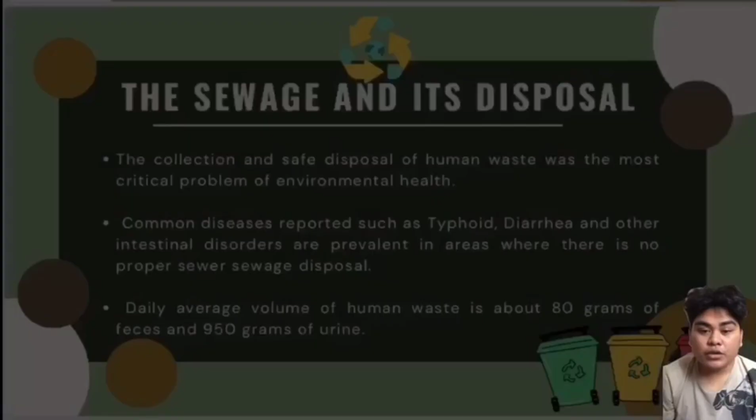Our topic is all about sewage disposal system. Ngayon, pag-usapan natin kung gaano ka-importante yung tamang pagde-dispose ng human waste. Ang collection and safe na pagtatapon ng mga tao ng basura ay isa sa pinakamahalagang suliranin ng ating environmental health na kailangan pagtuunan ng pansin. Maliban sa malaking epekto nito sa ating environment, meron din itong malaking epekto sa health ng mga tao.

Ayon sa isang statistical report, kalimitan sa mga waterborne disease katulad ng typhoid at diarrhea ay cause ng walang proper sewage disposal system. Kapag ang dumi o ihi ng tao ay nilagay mo sa isang hukay, yung mga bakterya ay hindi naman kayang umakyat palabas doon. So meaning, nadadala yung mga bakterya sa pamamagitan ng daloy ng tubig o yung mga hayop gaya ng ibon, daga, ipis at iba pang pwedeng magdala nito.

Ang daily average volume ng human waste kada tao ay umaabot ng 80 grams of feces at 950 grams of urine.

Kapag may halo naman sa tubig ito, ay may rate na 30 to 100 galon kada araw na nagiging kanal. Sa total ng sewage, 50% doon ang organic at nabubulok. Habang nade-decompose ito ay mas bumabaho at nagiging dark ang kulay.

On the other hand, maging bago o matagal na ito ay nagko-contain pa rin ng harmful organism that causes diseases. Dahil ayon sa WHO o World Health Organization, may mga tao pa rin walang proper na comfort room at sa open places sila dumudumi at umiihi, like sa dagat o sa ilog.

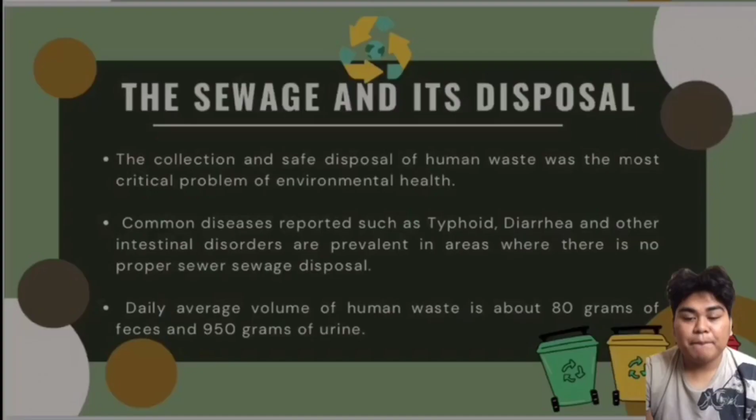Kaya ngayon, alam na natin kung gaano ka-importante ang sewage disposal system. Now let's talk about the types of sewage disposal system. Sewage disposal system has 4 types: the cesspool, the privy, the septic tank, and the public sewer line.

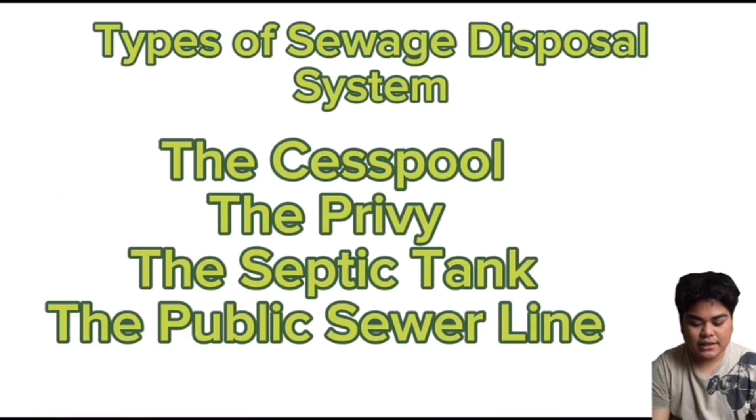Cesspool. The cesspool is a hole in the ground, curved with stones, bricks, concrete hollow blocks, or other materials laid in such manner as to allow raw contaminated sewage to leach into the soil. The organic waste accumulates and is finally disposed of by disintegration process.

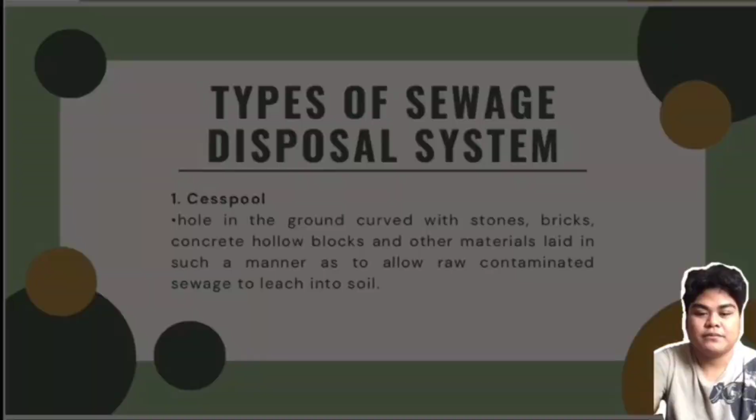So ano ang cesspool? Ang cesspool ay isang hole na binubuo ng bricks, concrete hollow blocks at mga bato. Ang standard size ng cesspool ay 750 to 1,500 gallons at may ilalim na 9 feet. Ang cesspool ay isang closed container at ang ilalim ay lupa na.

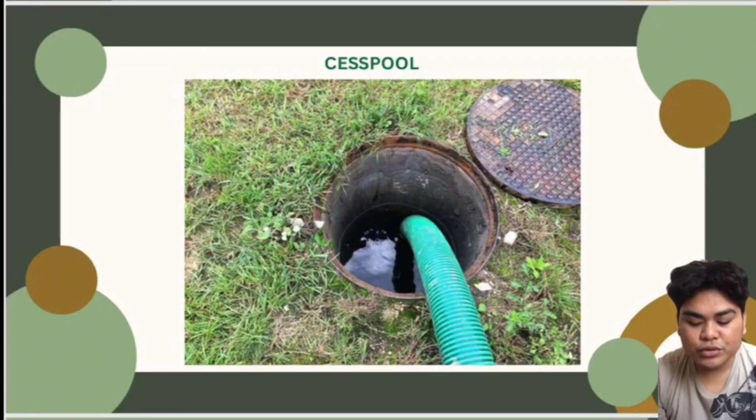Ang disadvantage nito ay mabilis mapuno at kailangan patanggalan ng laman ng 1 o 2 beses kada linggo, kaya naman malaki ang gasto. According to my research, cesspool that is well maintained can last up to 90 years. However, if you fail to regularly clean and empty your cesspool, even the most robust system won't outlast their design life.

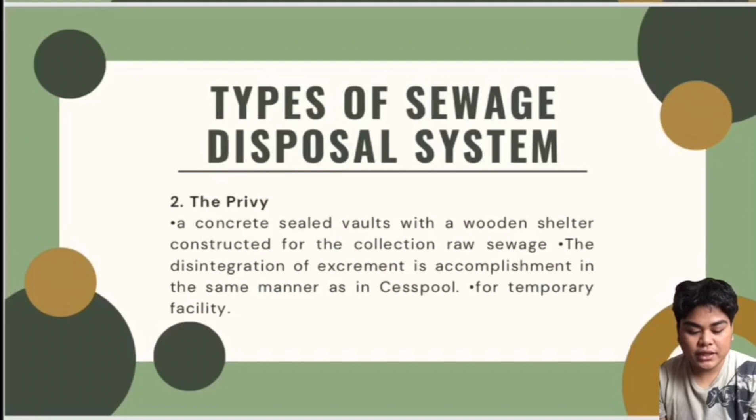Number 2, the privy. The privy is a concrete sealed vault with a wooden shelter constructed for the collection of raw sewage. The disintegration of excrement is accomplished in the same manner as in a cesspool. It is objectionable because of the danger of contaminating the source of water supply.

Ang privy, kung meron kayong nakikita sa mga movie na CR na walang bowl at sa sahigan may butas, at kahoy ang mga dingding, yun ang privy. Hindi ito kinakailangan na may tubig dahil hindi kailangan ng tubig para i-flush ang feces.

Merong ilang model ng privy na gumagamit ng ash, sand, sawdust para mapabilis ang pag-decompose ng mga feces at mawala ang amoy. Pero di pa rin maiiwasan ang paggamit ng tubig, at maaari nitong makontaminate ang groundwater dahil hindi naman sobrang secure yung human waste mula sa lupa sa paligid nito.

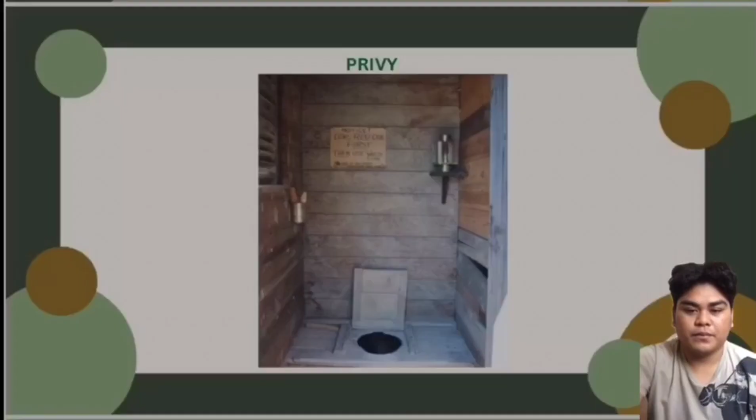Third, the septic tank. The septic tank is a device or receptacle used to expedite the decomposition of the elements contained in a raw sewage waste. Raw sewage consists of water and settleable solids called organic materials that can be precipitated in a septic tank in a very short time.

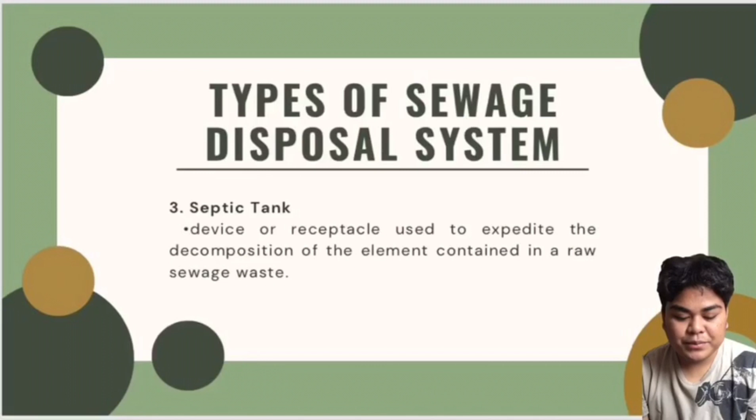So ang septic tank ay isang device or receptacle na ginagamit para mapabilis ang pagde-decompose ng mga elements sa loob ng raw sewage. So ano nga ba ang raw sewage? Ang raw sewage ay ang tubig at settleable solids, na ang mga organic material that can be precipitated sa septic tank sa maikling panahon.

Ang main function ng ating septic tank ay para ma-liquefy and precipitate ang solid waste. Septic tank is to hold the wastewater long enough to allow solids to settle down to the bottom forming sludge, while the oil and grease floats to the top as scum.

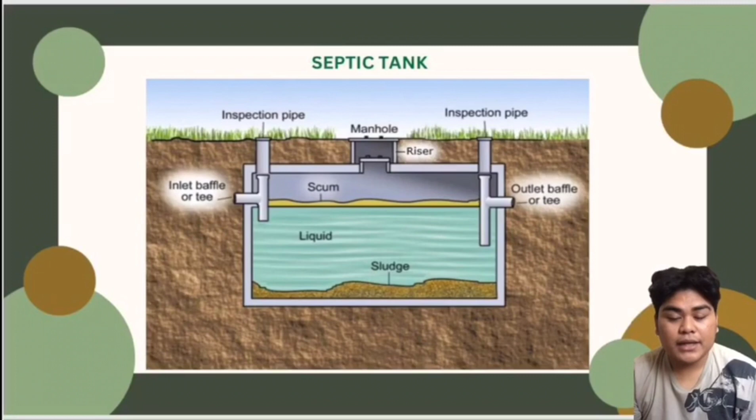The last one is the public sewer line. The public sewer line is a public sewage system operated and maintained by the government, consisting of a sewage treatment plant that conveys the raw sewage from buildings and houses to a disposal system.

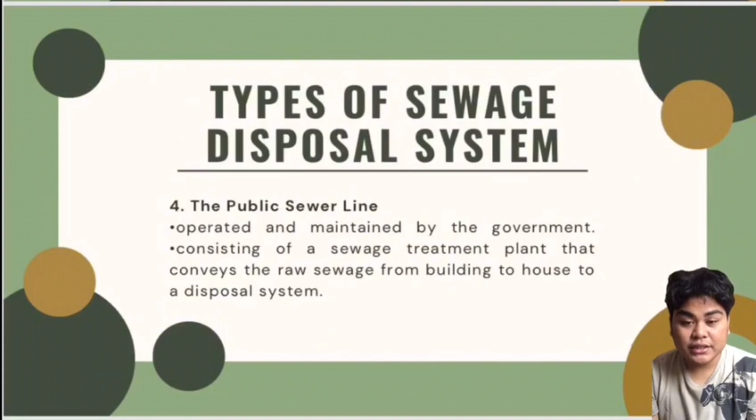Of these four types of sewage disposal, the cesspool and the privy are already obsolete. The prevailing types recommended by the sanitary authorities are the public sewer line and the septic tank.

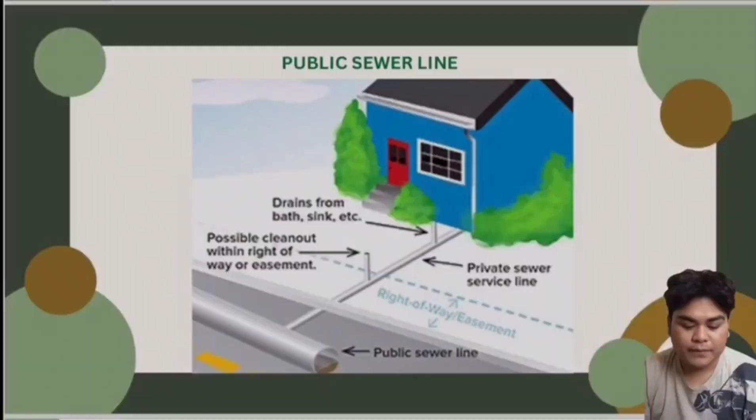The public sewer line is classified into three types: number one, the combination public sewer; number two, the sanitary sewer; number three, the storm drain.

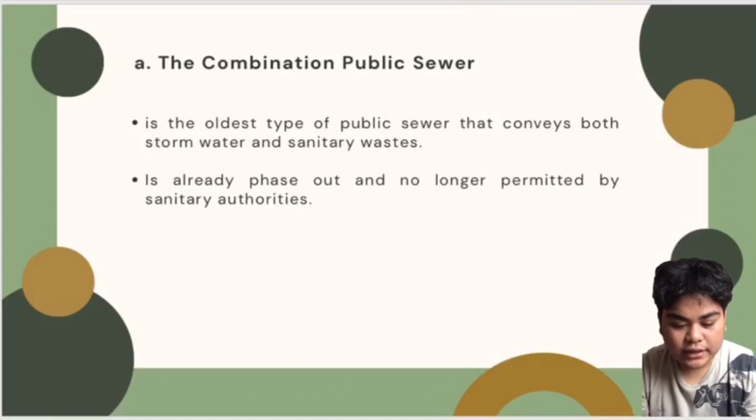The combination public sewer is the oldest type of public sewer that conveys both storm water and sanitary waste. This type of public sewer is already obsolete and no longer allowed by sanitary authorities.

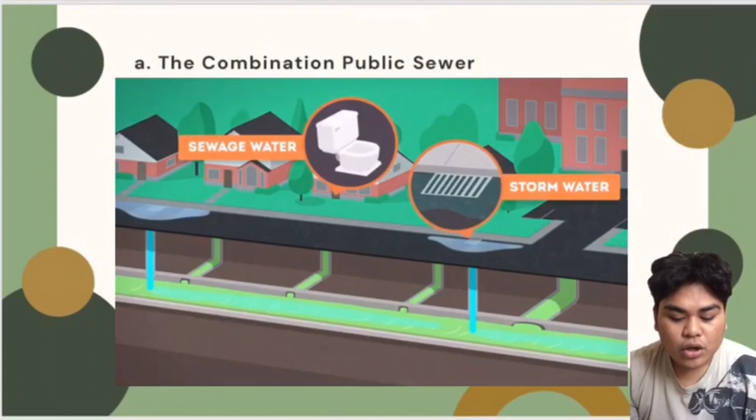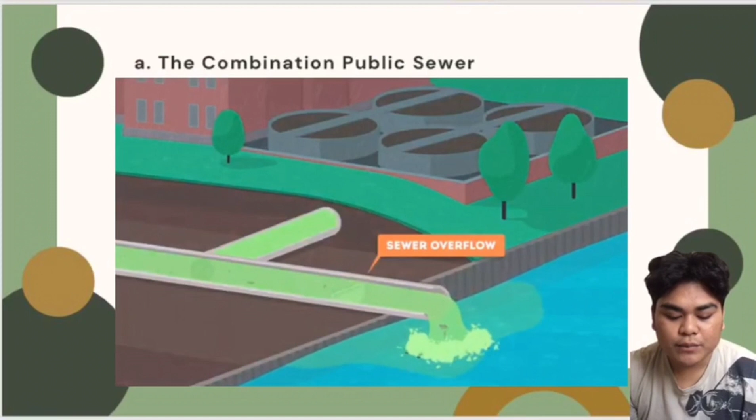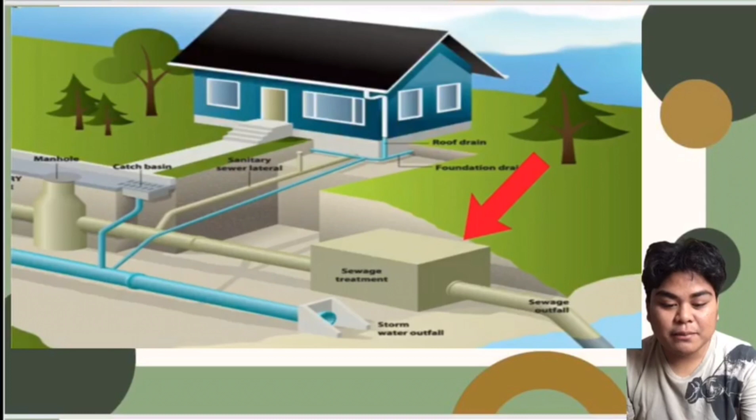Second, the sanitary sewer. The sanitary sewer is a public sewer facility that carries regular sanitary waste only. It terminates in a modern sewage disposal plant. Rainwater is not permitted to enter into this type of public sewer.

The sanitary sewer is classified into two types: number one, the intercepting or trunk line sewer; number two, the tributary or contributing sewer.

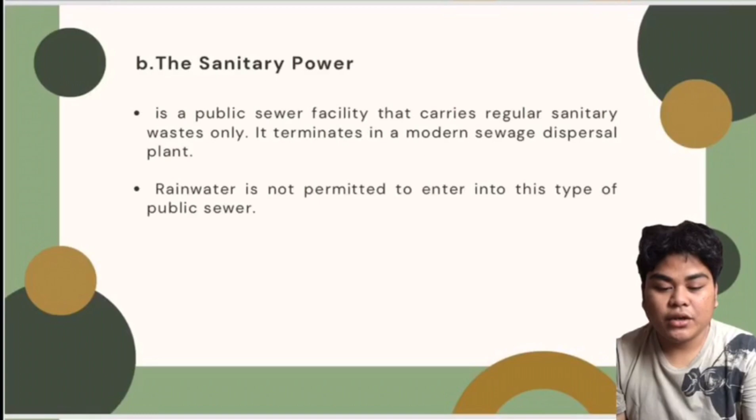The intercepting sewer is a sanitary sewer that conveys sanitary waste to a dispersal plant. It is commonly made of concrete pipe that varies in sizes from 0.60 to 3 meters in diameter. The pipes are laid underground to a minimum depth of about 3 meters, depending upon the natural contour of the ground.

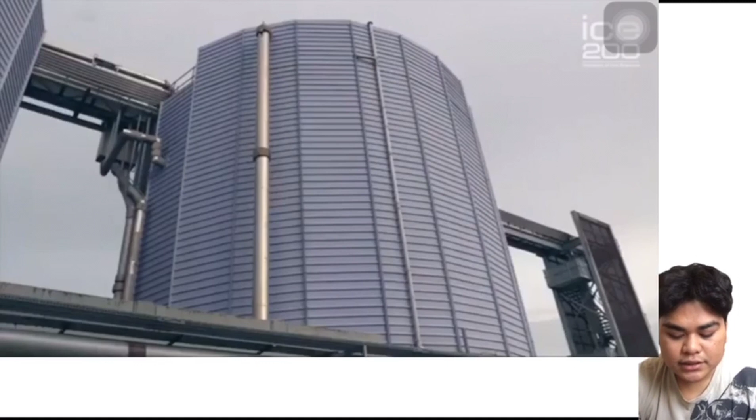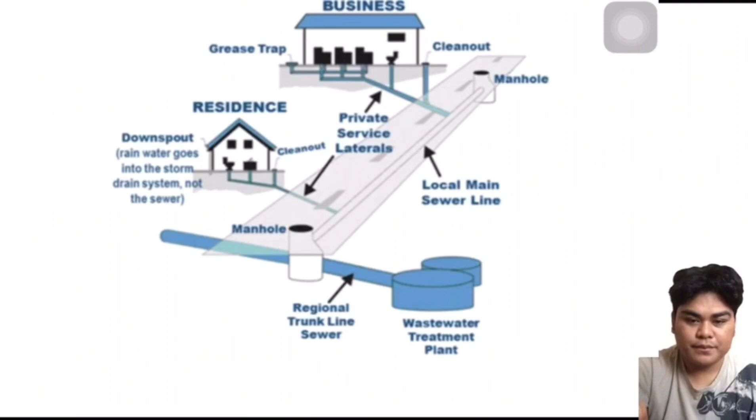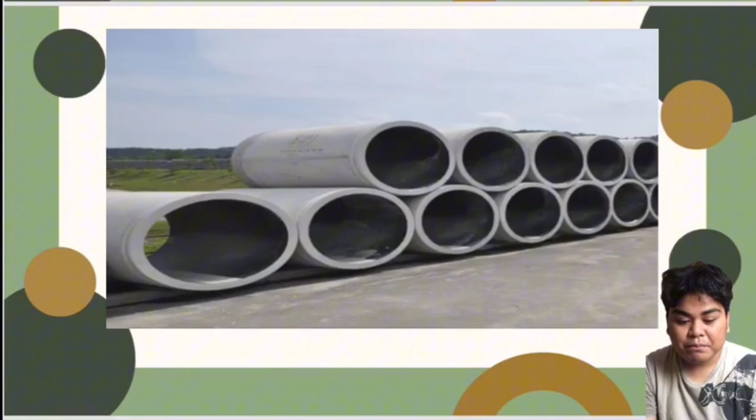The last one is the tributary sewer. The tributary sewer is classified as an intercepting sewer branch. The pipe is made of either vitrified clay or cement pipe laid in an open trench. It is generally smaller in diameter, installed not more than 3 meters below the street grade, and terminates into the intercepting sewer.

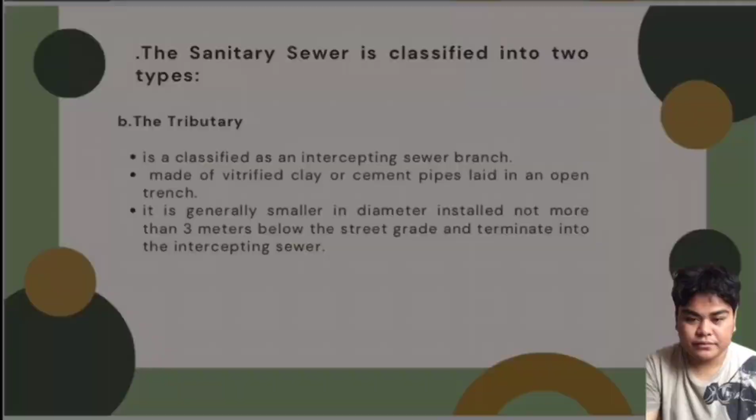The storm drain is another kind of public sewer line that carries storm water. It terminates in a natural drain such as canals, lakes, or rivers.

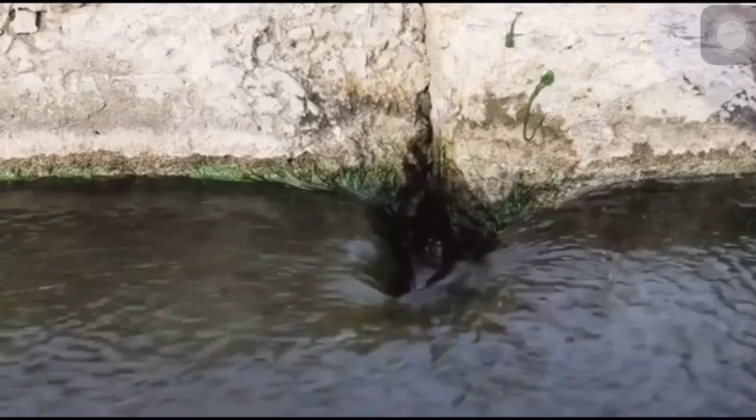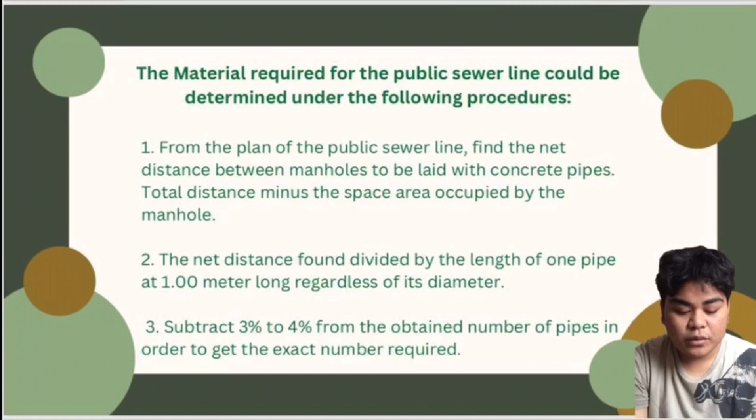The materials required for the public sewer line could be determined under the following procedures. Number one, from the plan of the public sewer line, find the net distance between manholes to be laid with concrete pipes: total distance minus the space area occupied by the manhole. Number two, divide the net distance found by the length of one pipe, at 1 meter long, regardless of its diameter. Number three, subtract 3% to 4% to get the exact number of pipes.

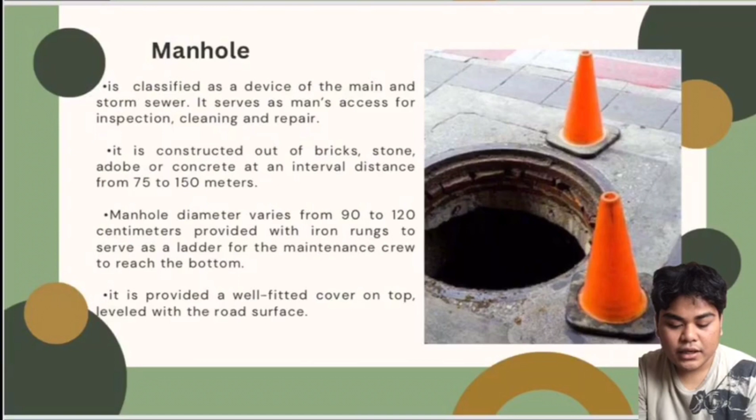Manhole is classified as a device of the main and storm sewer. It serves as man access for inspection, cleaning, and repair. It is constructed out of bricks, stone, adobe, or concrete at an interval distance from 75 to 150 meters. The manhole diameters vary from 90 to 120 centimeters, provided with iron rungs to serve as a ladder for the maintenance crew to reach the bottom. It is provided with a well-fitted cover on top, level with the road surface.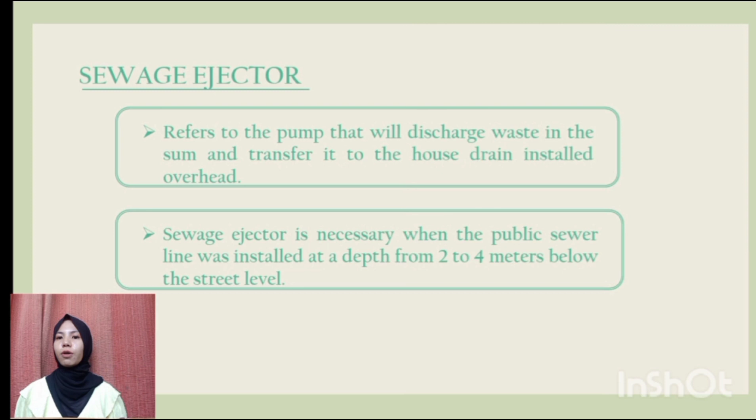Sewage ejector refers to the pump that will discharge waste in the sump and transfer it to the house drain installed overhead. It is necessary when the public sewer line was installed at a depth from 2 to 4 meters below the street level. So sewage ejector is a type of pump used to move sewage or waste water from a lower to a higher elevation. It is essential for properties with basements, bathrooms, or fixtures located below the main sewer.

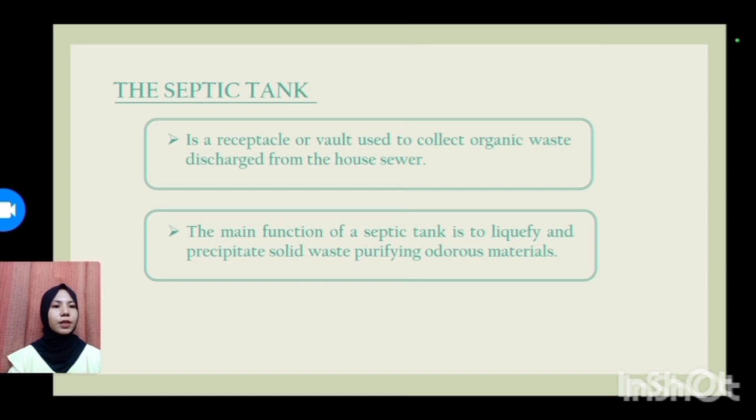The septic tank is a receptacle or vault used to collect organic waste discharge from the house sewer. Its main function is to liquefy and precipitate solid waste, purifying odorous materials. A septic tank is an underground chamber made of concrete, plastic, or fiberglass used for primary treatment of wastewater. Its function is to separate and partially treat solid waste and organic matter from wastewater before it is discharged into the soil for further treatment.

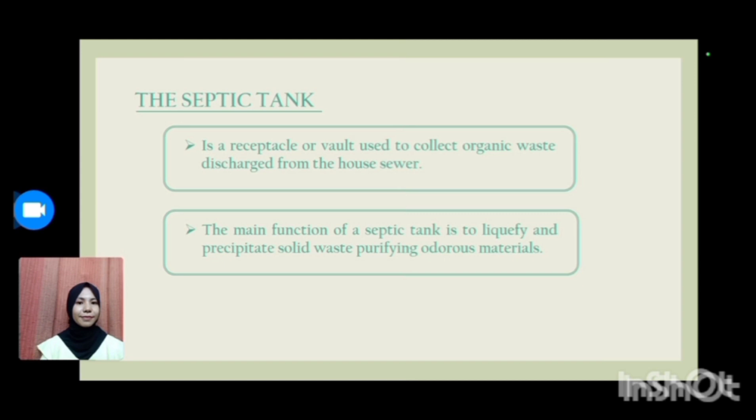What is an example of solids that are lighter than water? One example is tissue paper. So basically, anything that is a floating substance belongs to the scum. The liquid or effluent is the relatively clear or partially treated wastewater. Next is the sludge, which is the bottom layer. It consists of the heaviest solid waste materials that do not readily decompose, like our human waste, which belongs here.

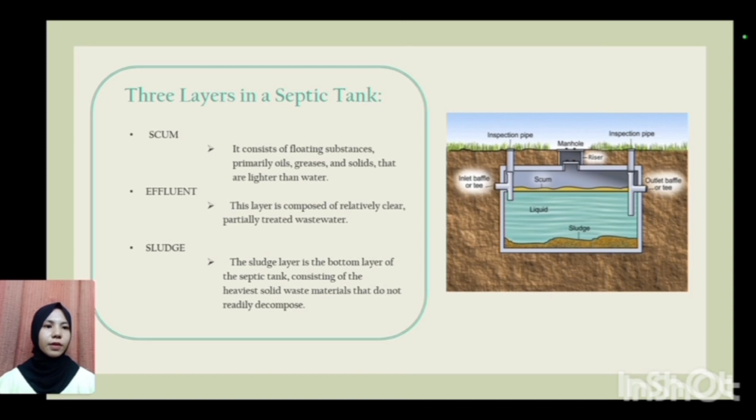If you look at the left side of the picture, there is the inlet baffle, and on the right side is the outlet baffle. At the inlet baffle, the wastewater enters, while at the outlet baffle, it exits. So once the wastewater enters the septic tank, separation occurs, which separates the floating substances from the heavier solid waste.

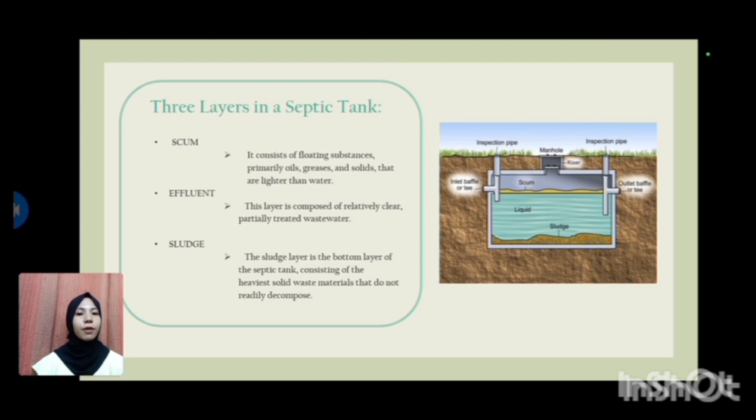The decomposition of organic matter from human waste is a bacteriological process caused first by aerobic bacteria or aerobes, next by anaerobic bacteria or anaerobes, and facultative bacteria. Aerobic bacteria function in the presence of oxygen, while anaerobic bacteria are the opposite, functioning in the absence of free oxygen. Facultative bacteria, on the other hand, function with or without free oxygen. These three types of bacteria have no relation to diseases. They thrive naturally in sewage and will function when conditions are favorable in terms of food supply, temperature, and moisture.

We have here the process of decomposition: anaerobic decomposition and aerobic decomposition. Anaerobic decomposition, referred to as putrefaction, is accompanied by bad odors. Since anaerobic bacteria function without the presence of oxygen, anaerobic decomposition causes bad odors, so the sludge develops a bad odor. A septic sewage turns dark and smells unpleasant due to anaerobic decomposition.

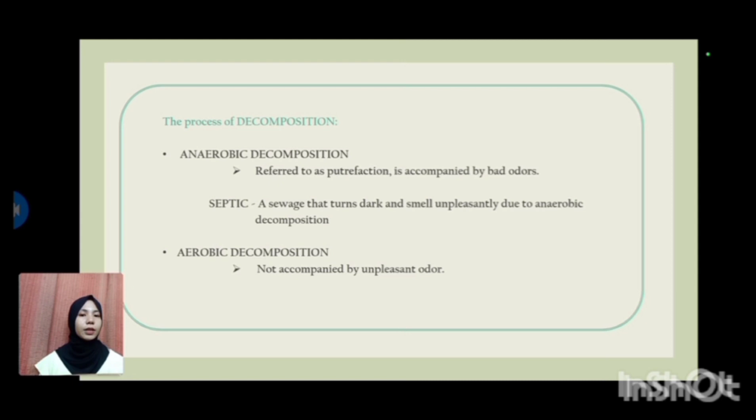Next is aerobic decomposition, which is not accompanied by an unpleasant odor, because it is the opposite of anaerobic decomposition. Aerobic bacteria function with the presence of free oxygen, so aerobic decomposition does not produce an unpleasant odor.

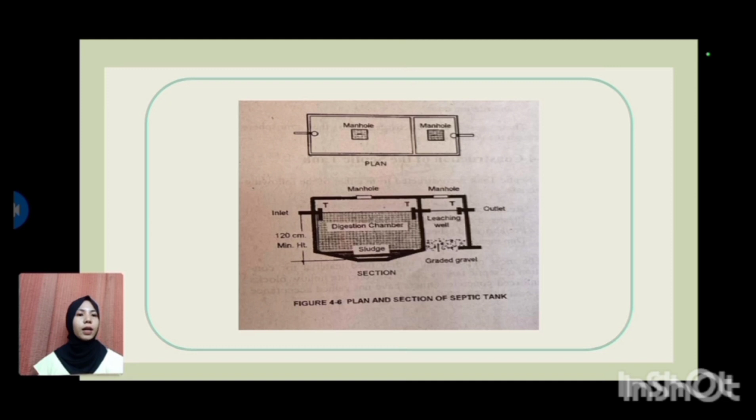Next is figure 4-6, which shows the plan and section of a septic tank. In the plan, you can see there are two chambers. In the section, as I mentioned, the left side is the inlet where the wastewater enters, and the outlet is where it exits. The first chamber is the digestion chamber, where separation and digestion happen. After the wastewater is separated, it goes to the leaching area for further treatment.

Next are the gases produced inside the septic tank. There are different gases produced inside the septic tank, ranging from organic to non-organic gases. These include methane gas, which is a combination of hydrogen and carbon, and a principal component of natural gas. Methane gas is odorless and colorless.

Second is carbon dioxide, a combination of carbon and oxygen; like methane, it is colorless and odorless. Next is carbon monoxide, a byproduct of methane, classified as a poisonous gas. Next is hydrogen, which evolves as a moist gas from organic waste. Fifth is hydrogen sulfide, a colorless gas with an offensive odor. Sulfur dioxide is also a colorless gas with an irritating odor.

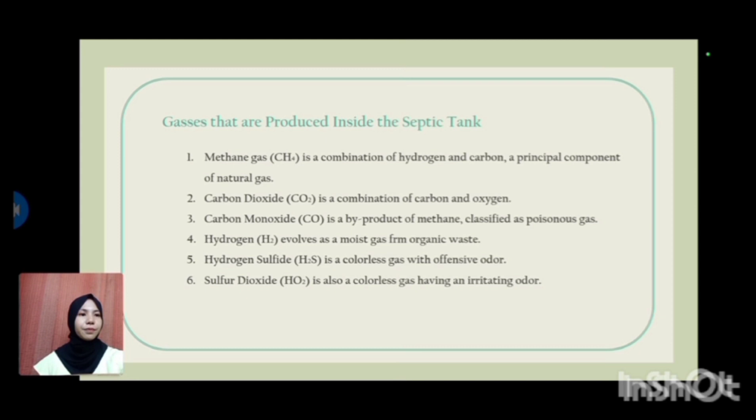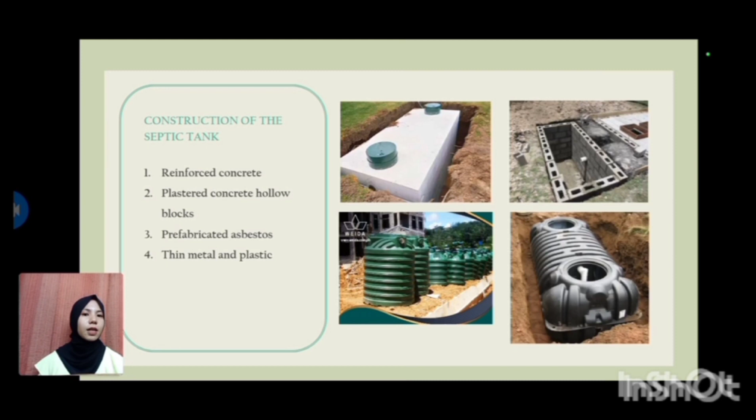Next is the construction of the septic tank. We have here the reinforced concrete, shown on the right side picture, plastered concrete hollow blocks. Next is the prefabricated asbestos. Fourth is thin metal and plastic.

General conditions in constructing a septic tank. The concrete or masonry septic tank is usually constructed in a rectangular form. The reason is to retard the even flow of the waste, which is necessary to avoid disturbing the decomposition processes inside the tank. Second, the minimum inside dimension of a septic tank is 90 cm wide and 150 cm long.

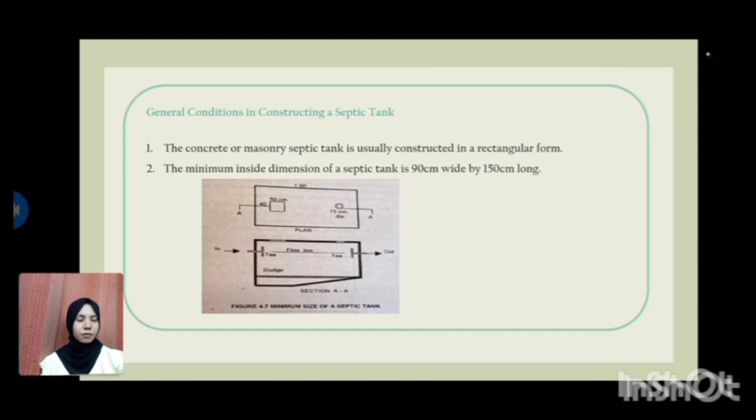As shown in figure 4-7, which shows the minimum dimensions of a septic tank. Number 3, for effective decomposition of the organic materials inside the septic tank, a 120 cm depth of the liquid content is necessary. Next, the inlet and outlet inverts of the septic tank shall be long sanitary tee.

The invert is extended down the liquid of the tank not more than 30 cm. The bottom of the digestion chamber should be sloped to one low point. Number 7, the septic tank should be provided with a manhole extended a few centimeters above the surface of the soil to overcome infiltration of surface water, as shown in figure 4-8, which is a single chamber septic tank.

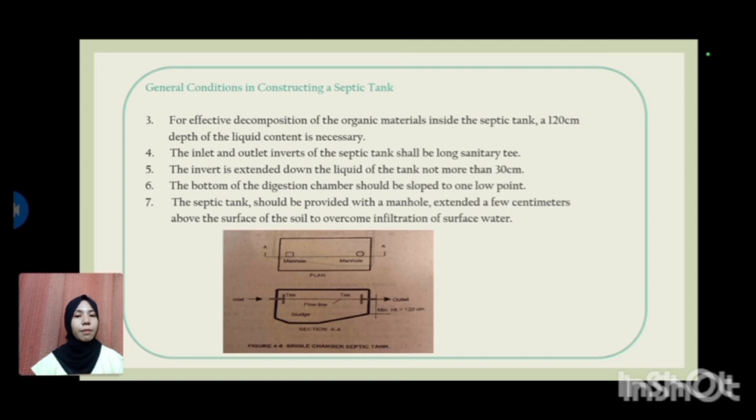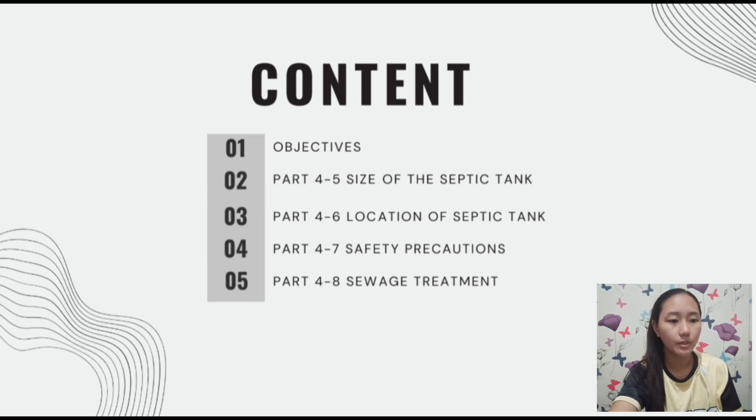Contents: number 1, objectives; number 2, part 4-5, size of the septic tank; number 3, part 4-6, location of septic tank; number 4, part 4-7, safety precautions; number 5, part 4-8, sewage treatment. Learning objectives: by the end of this lesson, students will be able to identify the size of the septic tank, locate the location of the septic tank, and know the safety precautions and distinguish sewage treatment.

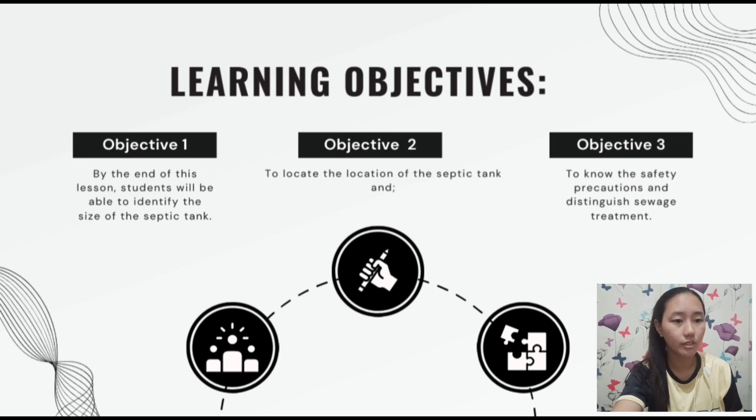Part 4-5, size of the septic tank. So far, there is no mathematical formula ever formulated to arrive at a definite size of a septic tank. However, sanitary authorities agree in principle that, number 1, for a family of 6 persons, the minimum tank capacity should be approximately 1.3 cubic meters with a minimum size of 90 centimeters wide by 150 centimeters long and 120 centimeters deep.

Number 2, a very large tank is not advisable because the bacterial activities would be retarded. The size of the tank is proportionally based on the number of persons expected to be served. In other words, the volume of a tank has a rational proportion with the volume of incoming waste for bacterial activities to be in favorable condition.

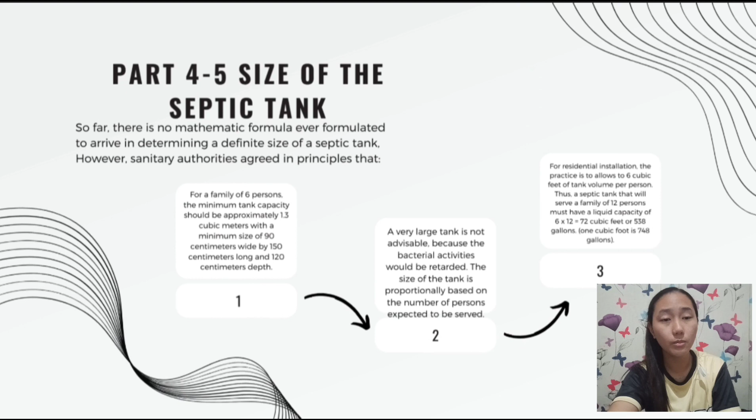Number 3, for residential installation, the practice is to allow 5 to 6 cubic feet of tank volume per person. Thus, a septic tank that will serve a family of 12 persons must have a liquid capacity of 6 times 12 equals 72 cubic feet, or 538 gallons. So, 1 cubic foot is equal to 7.48 gallons.

Technical data in determining the volume of a septic tank, given as follows: minimum width is 90 centimeters, minimum length is 150 centimeters, and minimum depth or height is 120 centimeters.

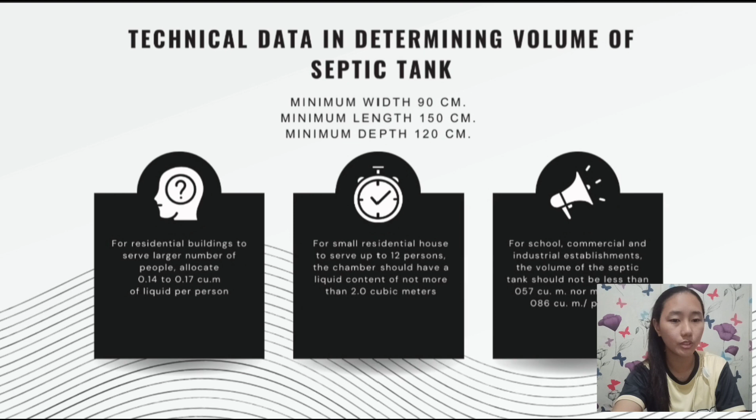When a large amount of wastewater is coming from showers, baths, laundry, and others, it is not advisable to permit these waters into the septic tank. Likewise, all downspouts collecting water from the roof should not be allowed to terminate into the septic tank. Rainwater should be conveyed to the storm drain.

Let's proceed to solving. Determine the size of a septic tank to serve 200 persons in a commercial establishment.

Number 1, to determine the volume of a septic tank, refer to the technical data information mentioned earlier. For commercial establishments, we find the value of 0.057 cubic meters. Multiply that by 200 persons: 200 times 0.057 equals 11.4 cubic meters.

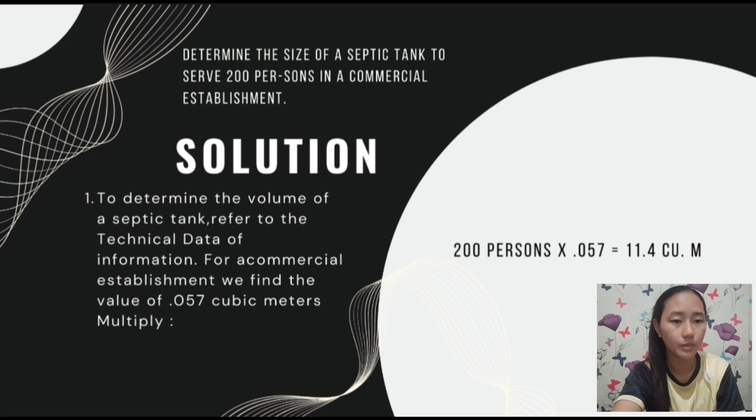Number 2, assume 1.2 meter width of the tank per 100 persons. So for 200 individuals, multiply: 200 times 1.2 equals 2.40 meters width.

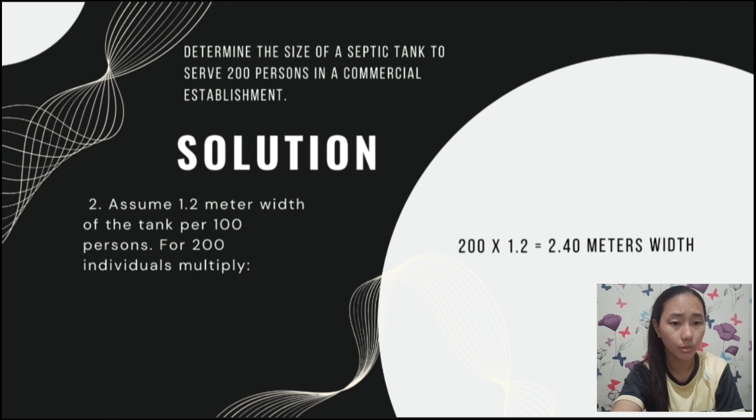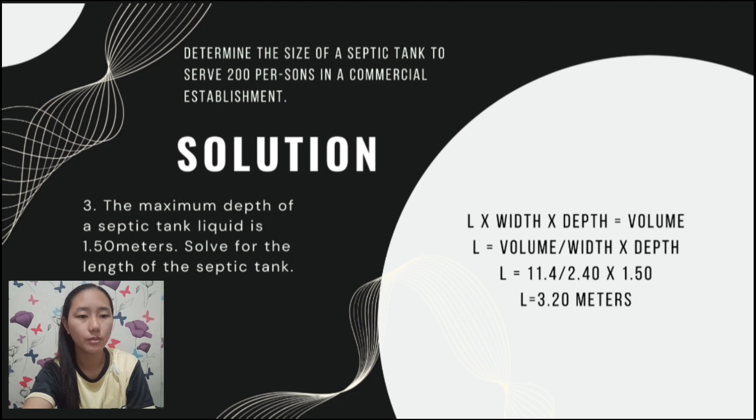Number 3, the maximum depth of a septic tank liquid is 1.50 meters. So solve for the length of the septic tank. There's a formula: length times width times depth equals volume. So length equals volume over width times depth.

The volume from earlier is 11.4. Let's substitute: 11.4 over 2.40 times 1.50. So the length of the septic tank becomes 3.20 meters.

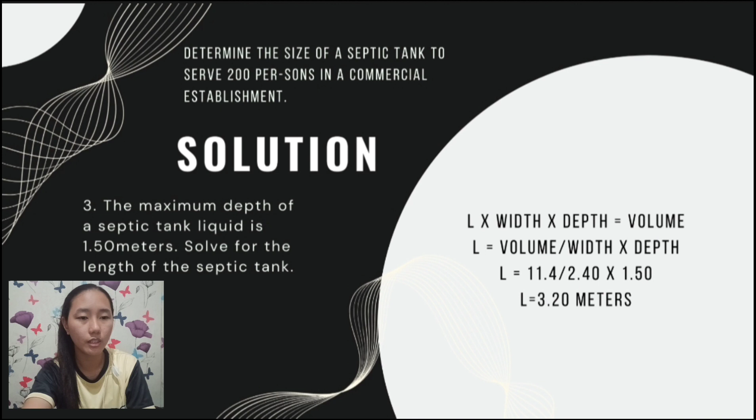This value of L is only for the length of the digestion chamber. So divide it by 2, then add the result to the value of L to include the leaching well. L over 2 plus L equals 3.20 over 2 plus 3.20, which equals 4.80 meters total length.

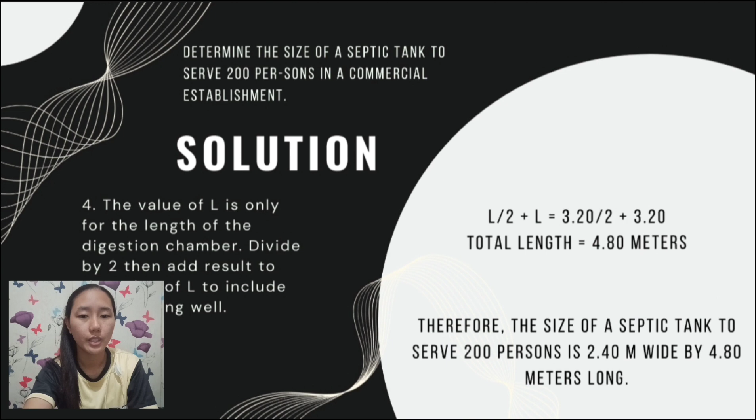Therefore, the size of the septic tank to serve 200 persons is 2.40 meters wide by 4.80 meters long. Next, another problem.

A motel with toilet, bath, and kitchen facilities will serve a maximum of 100 persons. Determine the capacity and dimensions of a septic tank.

Solution, number 1, refer to table 4-2, which I'll show later. Under motel with bath, toilet, and kitchen, the waste per person per day is 50 gallons. Multiply by 100 persons gives 5,000 gallons a day.

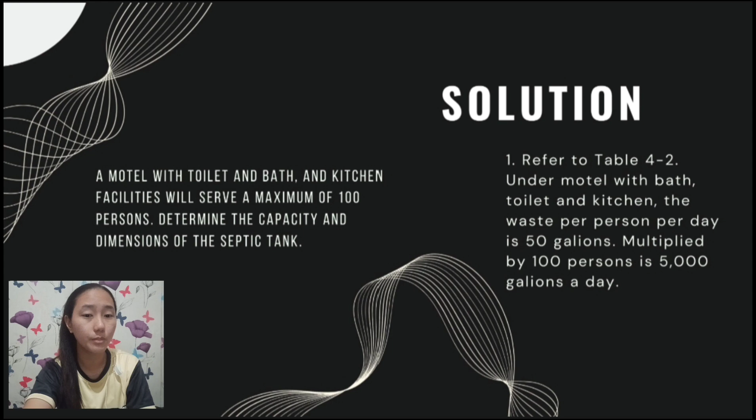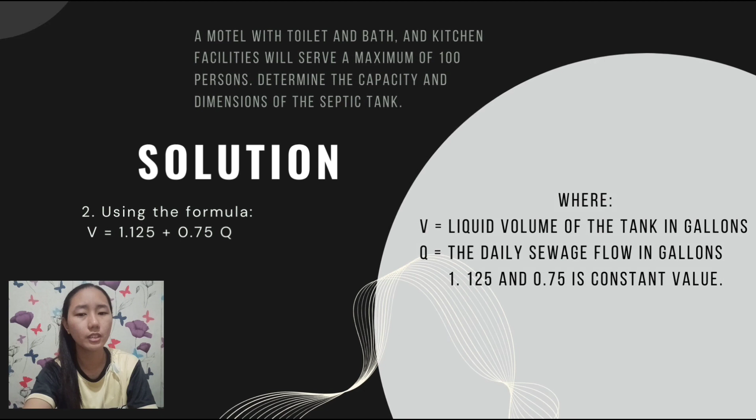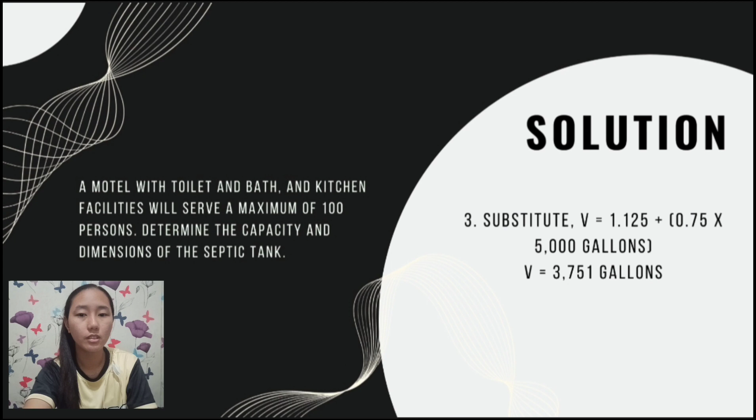Using the formula V equals 1.125 plus 0.75Q, where V is the liquid volume of the tank in gallons and Q is the daily sewage flow in gallons, with 1.125 and 0.75 as constant values, substitute: volume equals 1.125 plus the quantity of 0.75 times 5,000 gallons, which equals 3,751 gallons.

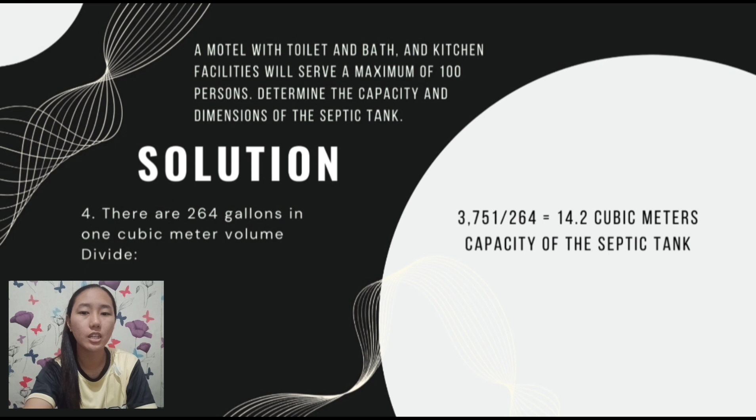Number 4, there are 264 gallons in 1 cubic meter of volume. So divide: 3,751 divided by 264 equals 14.2 cubic meters, which is the capacity of the septic tank.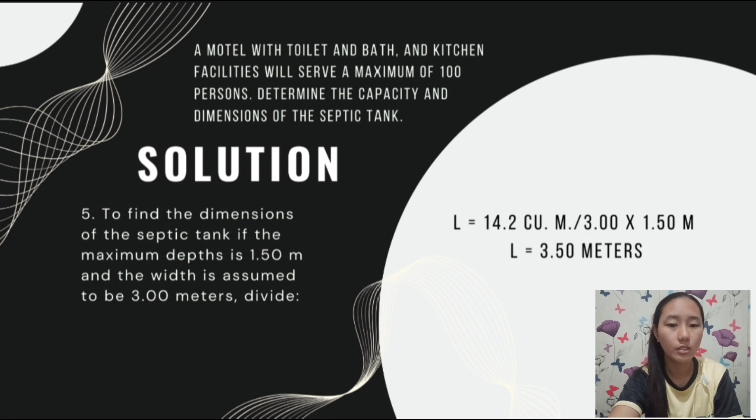To find the dimensions of the septic tank, if the maximum depth is 1.50 meters and the width is assumed to be 3.0 meters, we use the same formula: volume over width times depth. So 14.2 cubic meters divided by 3.0 width times 1.50 depth equals 3.50 meters.

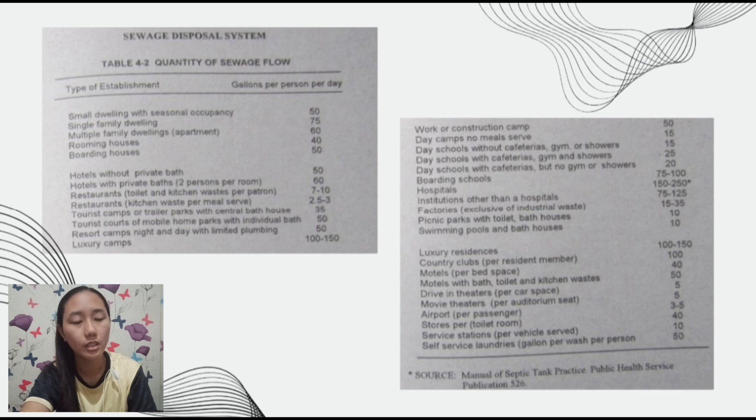This is the table I mentioned earlier, sewage disposal system table 4.2. It shows the types of establishments and the gallons per person per day. As I said, motels with bath, toilet, and kitchen have 50 gallons per day.

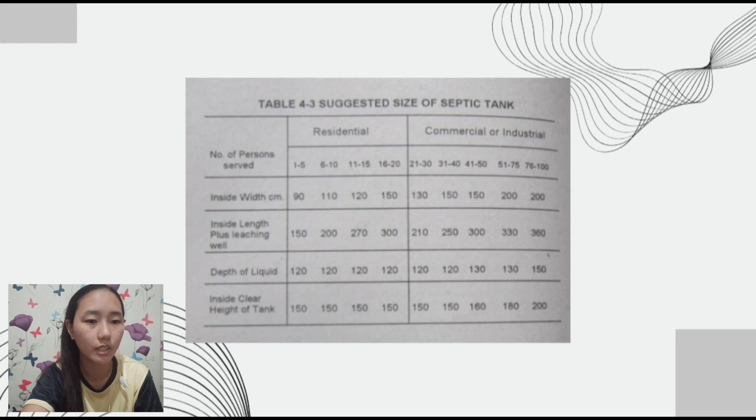Next is table 4-3, the suggested size of a septic tank. It shows residential and commercial or industrial categories, and the number of persons served, such as 1 to 5. The suggested size includes an inside width of 90 cm, inside length plus leaching well of 150 cm, depth of liquid of 120 cm, and inside clear height of the tank of 150 cm, and so on. Please read it yourselves.

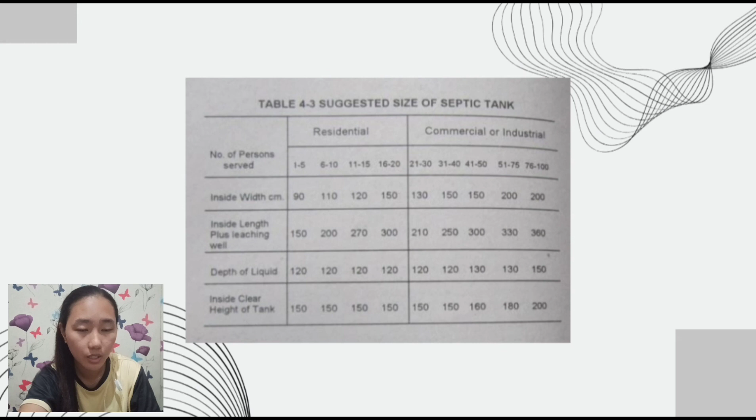Then another topic is the maximum allowable sludge accumulation in a septic tank. What is sludge? Sludge is thick, soft, wet mud, or a similar viscous mixture of liquid and solid components.

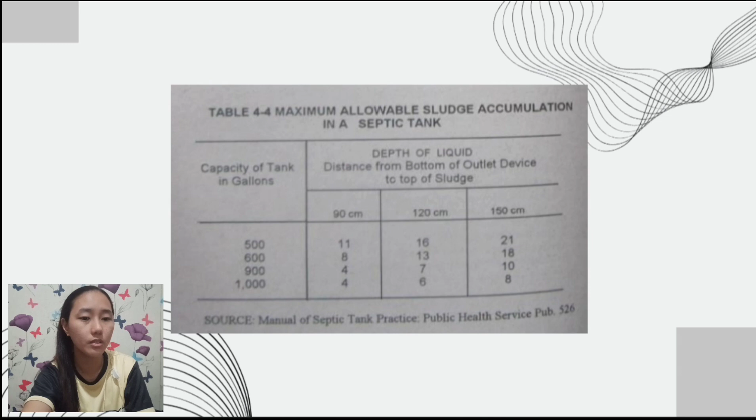It accumulates inside, at the bottom part of the septic tank. This table shows the capacity of the tank in gallons, the depth of liquid, and the distance from the bottom of the outlet device to the top of the sludge. For example, at a height of 90 cm, the sludge is about 11 cm. Part 4 to 6 covers the location of the septic tank.

Location of septic tank shall observe the following considerations. These are the things we should consider wherever we place a septic tank. Number 1, the septic tank may be located closer to the building it will serve, providing a minimum distance of 2.00 meters from the outside wall.

Number 2, as much as possible, the septic tank should not be located closer to the doors or windows. Yes, because we might smell it.

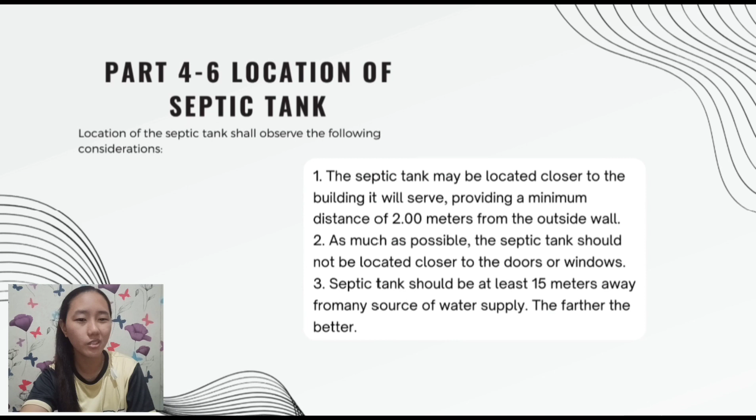Number 3, septic tank should be at least 15 meters away from any source of water supply. The farther, the better. Yes, because what if there's a leakage that happens, then what's in the septic tank mixes with your water supply source, right? That would be difficult. Requirements of a satisfactory disposal of human waste.

There should be no contamination of ground surface that may enter into the spring or wells. So there should be no contamination visible on the surface of our ground that could enter the spring or wells. Number 2, there should be no contamination of surface water.

Number 3, the surface soil should not be contaminated also. Number 4, excreta should not be accessible to animals, flies, cockroaches, vermin, and the like. So our excreta, our waste, should not be accessible to animals or flies, because flies are really dirty.

Number 5, there should be no odor and unsightly conditions. Number 6, the methods used should be simple and economical in terms of construction and operations. Yes, the method used should just be simple and economical.

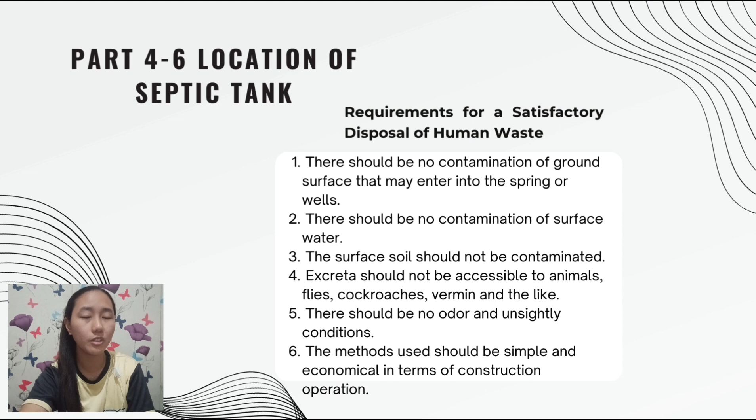Number 4 to 7 is safety precautions. In most cases, septic tanks are poorly aerated or ventilated. It lacks free oxygen. Under this condition, an individual entering into a septic tank for making repairs or cleaning purposes may meet almost instant death.

Another precaution is to apply fresh air inside the tank while work is being done. Septic tanks may contain harmful and dangerous gases. When repair work or cleaning is to be made, be sure that the septic tank is well ventilated. How? By removing the manhole cover a few days in advance of the work.

Remember that the tank may contain inflammable gases that might be ignited to cause terrific explosions. So if we need to use light for the work because it's dark, we should use an electric emergency light with a properly insulated cord. In the absence of electricity supply, if there's no power, it's safer to use a flashlight powered by dry cell battery.

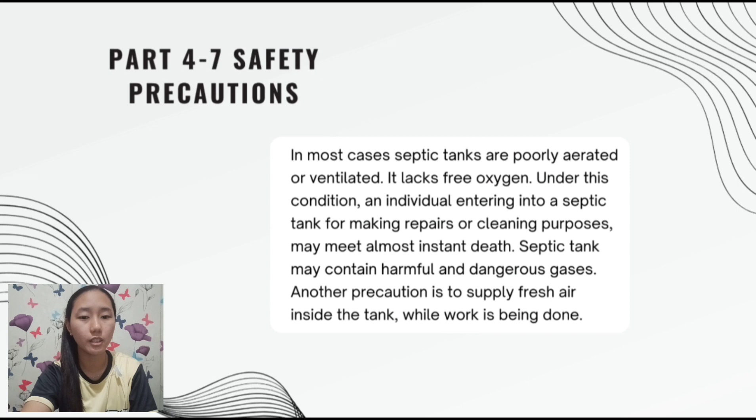4 to 8, lastly, is the sewage treatment. The effluent removed from the septic tank is still in the stage of objectionable matter. Although these organic matters have been removed and many of the objectionable gases have been eliminated, it still contains countless numbers of harmful anaerobic bacteria and objectionable chemical compounds in solution that must be disposed of.

There are several methods and processes wherein sewages may be treated. The most commonly used are the activated sludge process and the trickling or sprinkling filter process.

The activated sludge process is a type of biological wastewater treatment process for treating sewage or industrial wastewater using aeration and biological floc. It uses oxygen or air and microorganisms to biologically oxidize organic pollutants, producing waste sludge containing the oxidized material. Its importance is that it separates solids that have dissolved into the sewage mixture, and therefore it makes filtration easier.

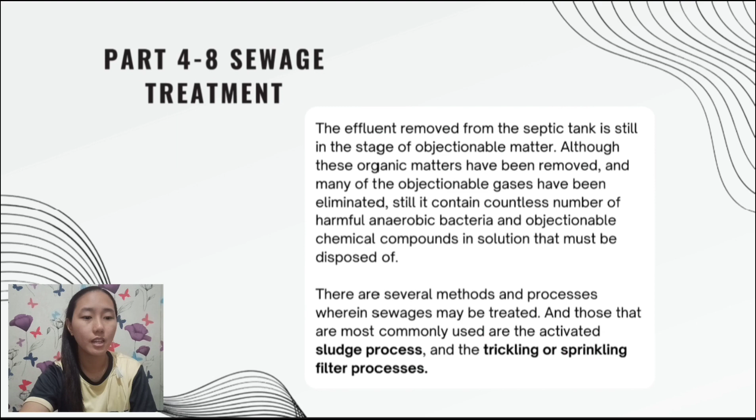That should be all. Life is like a sewer. What you get out of it depends on what you put into it. By Tom Lehrer. Thanks for watching.